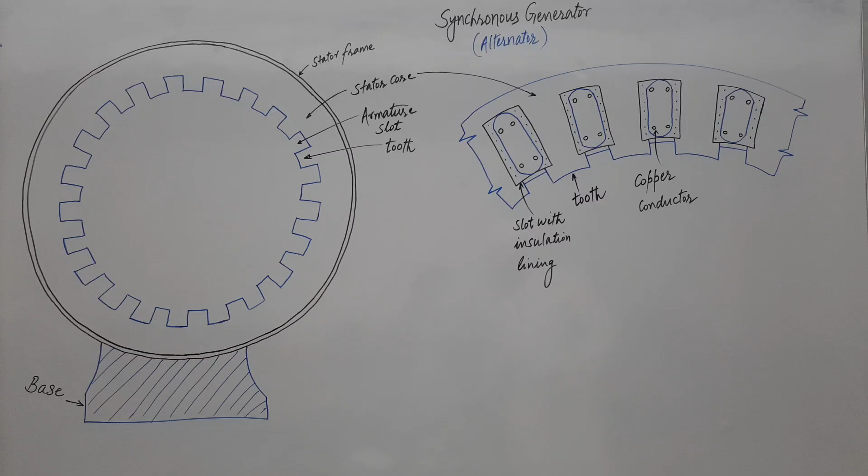Dear students, today I am going to start synchronous machine, and this is the first lecture. So first we will cover the construction part, then later the remaining topics will be covered. Like other electrical machines, synchronous machines also have two major parts. One is a stator, a stationary part, and another one is rotor, rotating part, which I will discuss later.

This stationary part, known as a stator, carries armature windings. Armature windings are placed in the slots cut on inner periphery as shown in the figure, in which EMFs are generated. How, we will discuss later. So starting from the various parts of a stator, first we will discuss a stator frame. So this is outer part, you can see here.

Basically this machine has a cylindrical shape, and what we can see on board is cross sectional view. So from here we can see that the outer part is a stator frame which provides support. It is made up of cast iron for small size machines, but for large size machines welded steels are used.

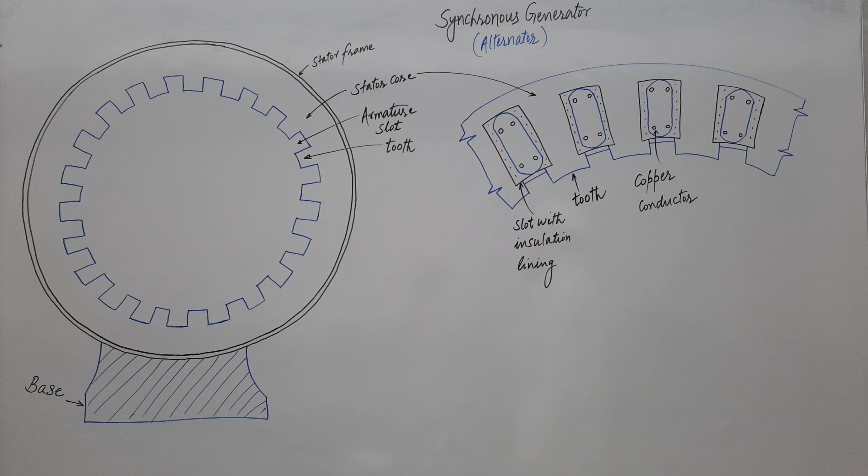And this part is known as a stator core. This is core shown here. So basically a stator core is assembled with high grade silicon content steel laminations to reduce hysteresis and eddy current losses. As we know, these laminations are insulated from each other by means of varnish insulation and stacked together, tightened by means of nuts and bolts.

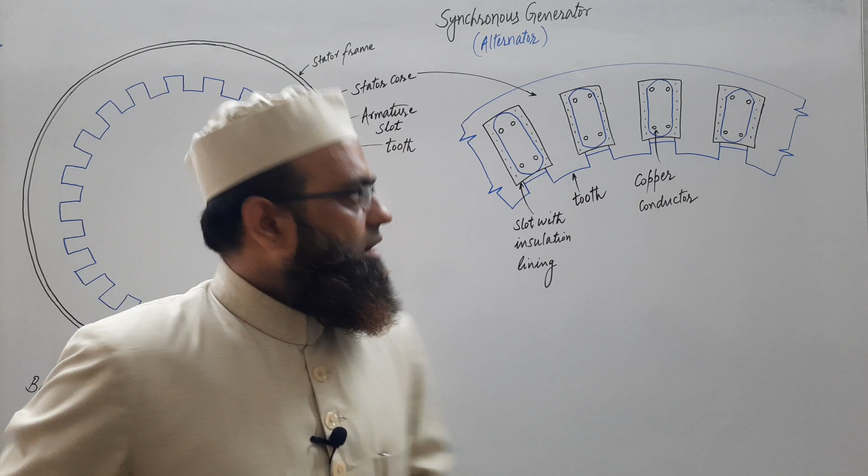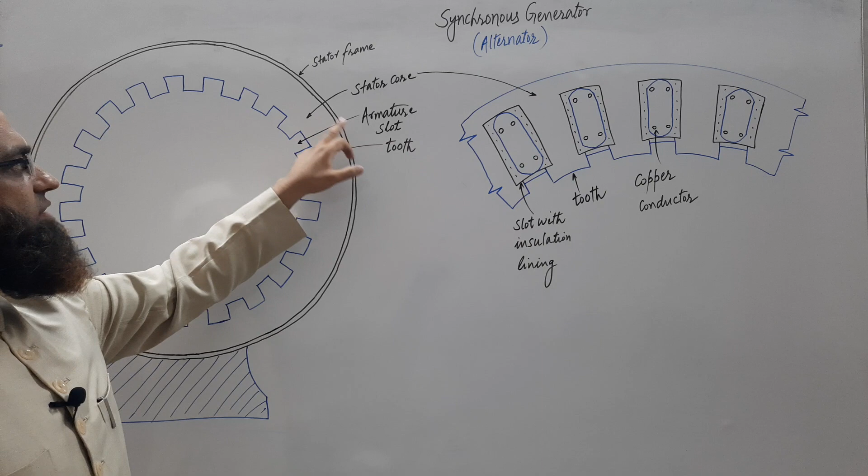Radial ventilating ducts are also provided for the purpose of cooling of the machine. This core basically provides a good path with low reluctance to the flow of flux. This is an enlarged view of a small portion of this stator. As you can see, the same tooth, this is core, and slots, these are slots. Slots are cut on the inner periphery of a stator as discussed earlier.

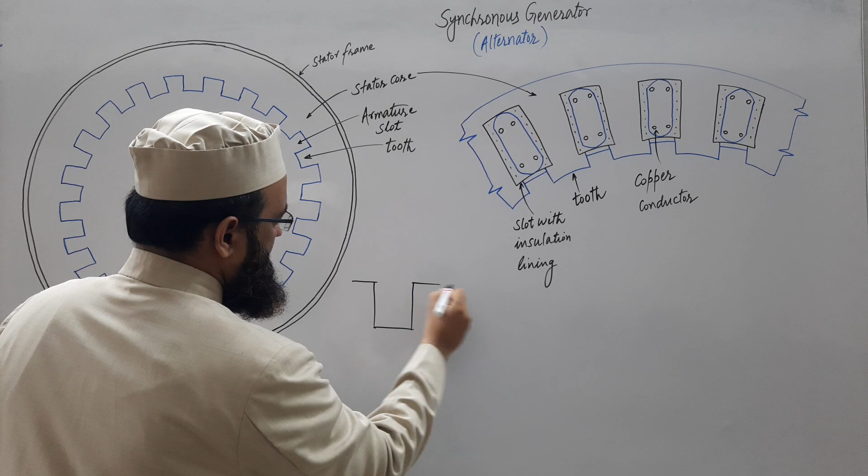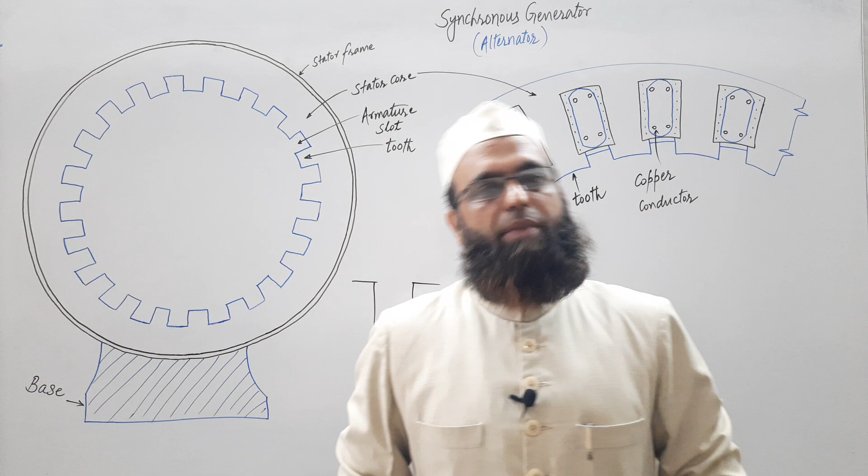These slots may be open type or semi closed type. So open type slots will be like this, open type, or semi closed type, something like this. You may write open type, semi closed type. Copper conductors are placed in the various slots and connected in a particular fashion so as to form a balanced three-phase stator winding, in which three-phase balanced EMFs are generated.

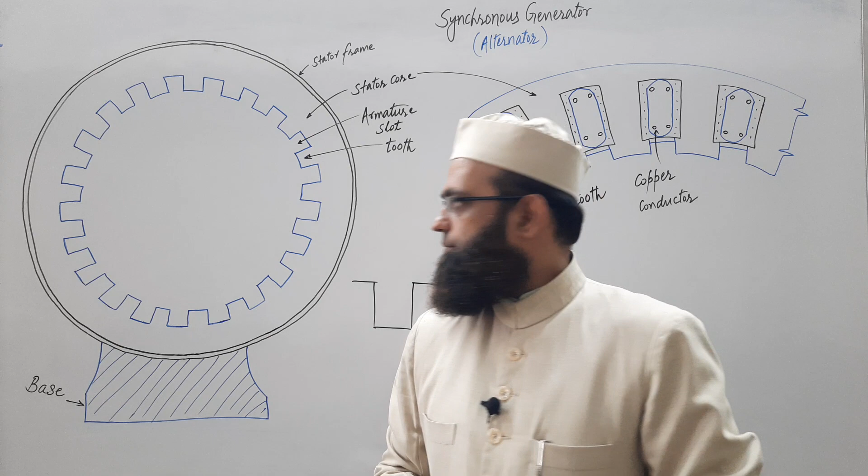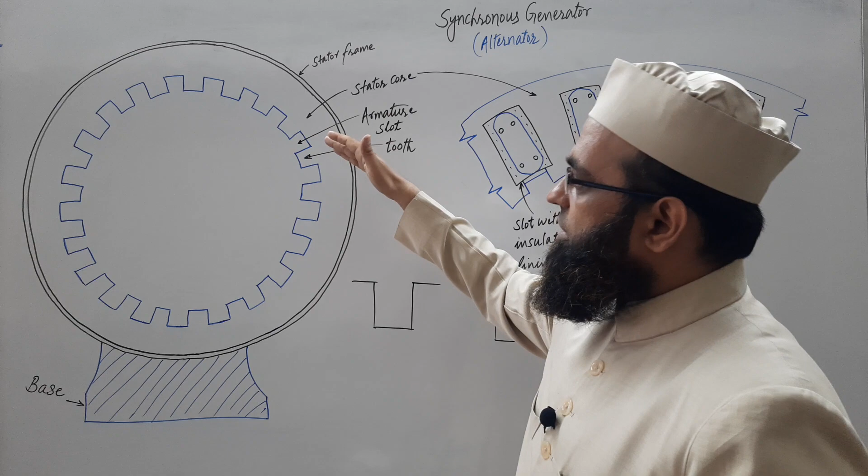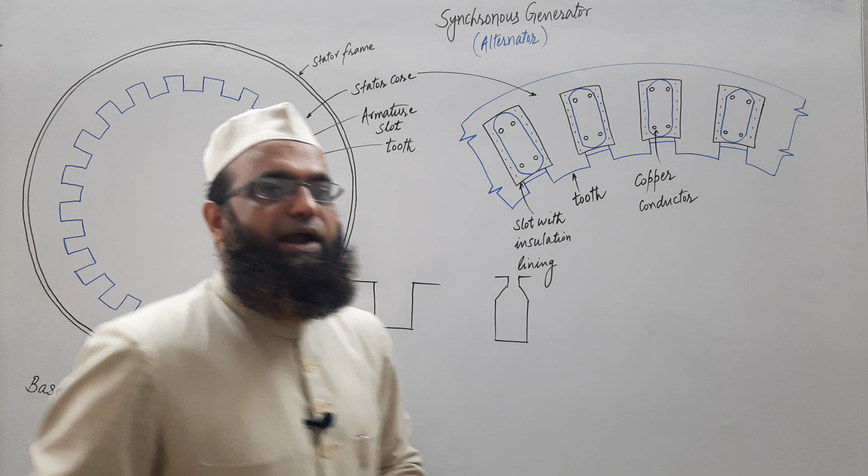Various conductors of a particular phase are distributed in several slots to reduce certain harmonics. So generally we use double layer winding, which we discussed during our DC machine lectures also. So we know what double layer winding and fractional slot mean. Here we will focus on construction basically, not on winding design.

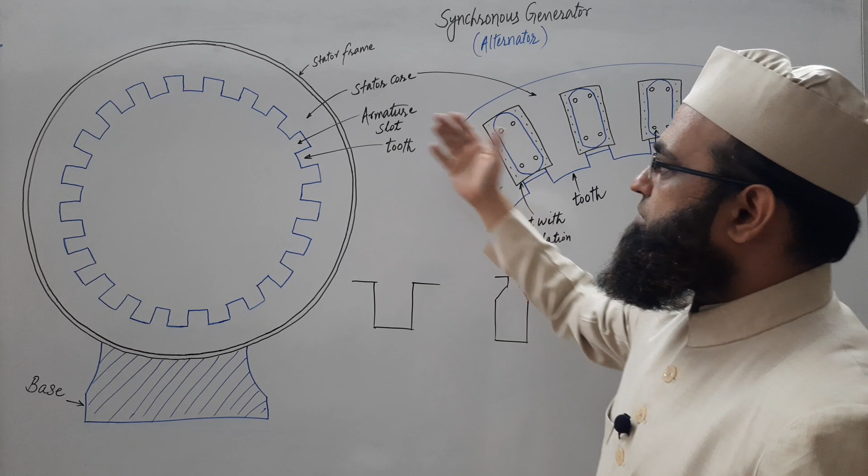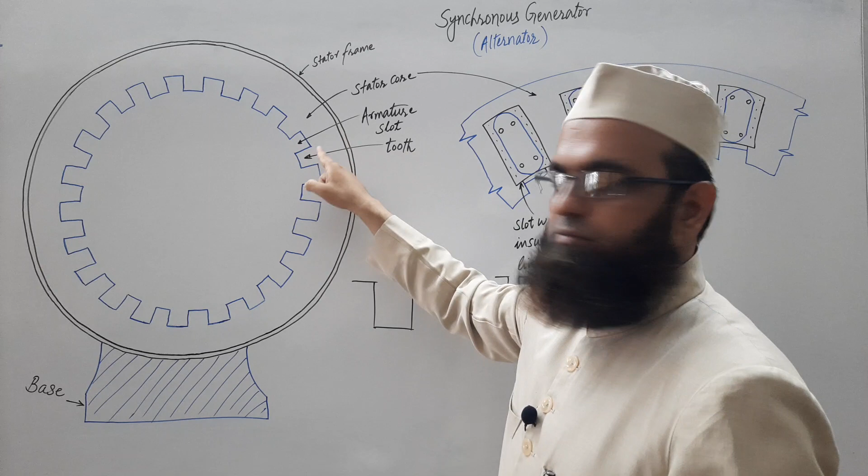So just to have an idea of various parts of a stator, what is a stator frame, what is a stator core, what are the purposes of stator core, what are the various materials used, what is armature slot, why we cut slots on inner periphery, and this one is tooth. This is slot, this is tooth. Here also you can see this tooth, enlarged view, and this slot.

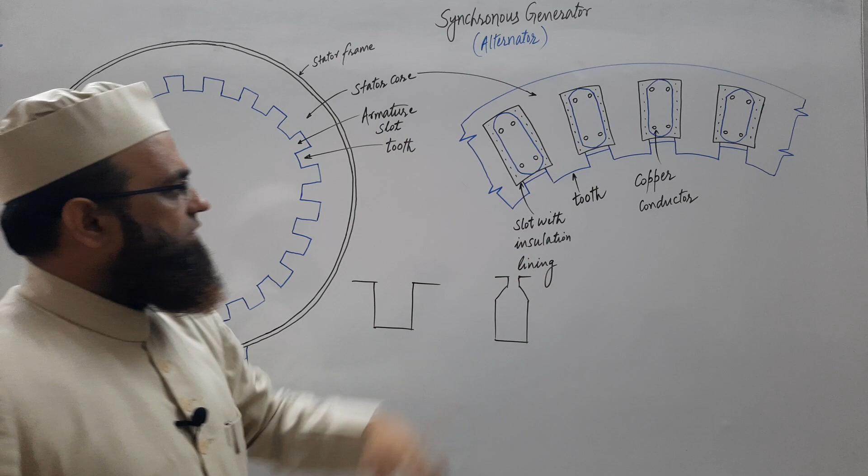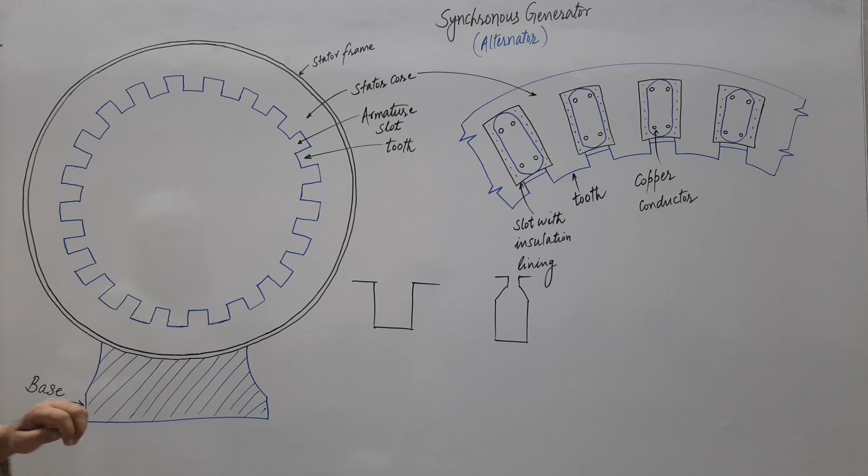Here copper conductors are there, these are copper conductors, tooth, and slots, the same armature slot with insulation lining. Tooth is also iron part and provides path to the flow of flux. And this is base. Base basically provides a support to the machine, the bottom portion.

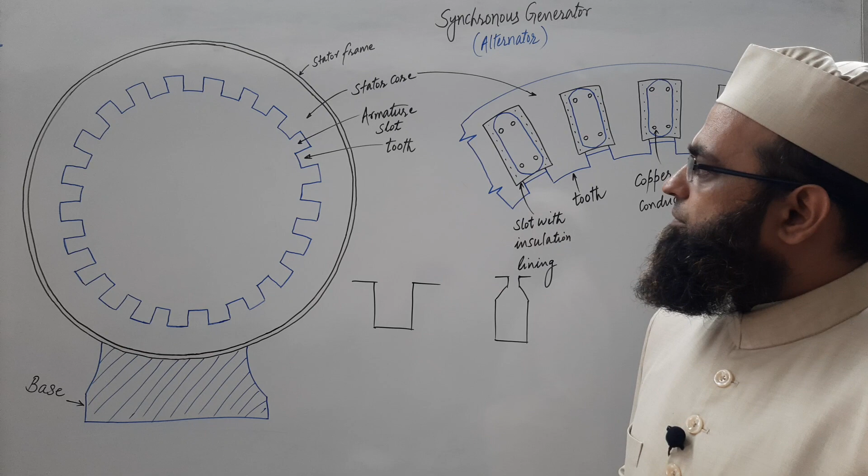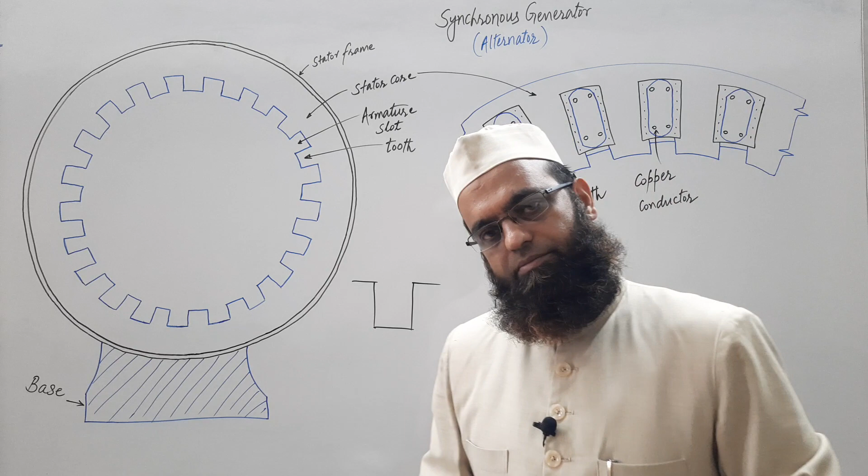So this is a brief introduction of a stator of a 3-phase synchronous generator, also known as alternator. So, next we will discuss construction of rotor, then we will proceed with our next topics.